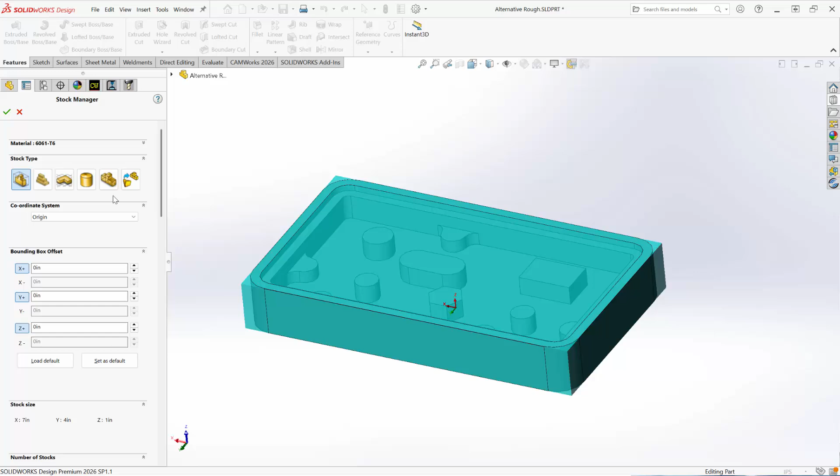Let's start out by getting everything set up. I have a generic machine selected. I'm just going to double check my stock manager. Looks pretty good for what we're doing, and then I'll just go ahead and select a coordinate system location.

Now that this is set up, what I'm going to do is manually create my mill part setup. I don't want any other features, so I'm going to go ahead and turn those off. We'll select this bottom face so that we're pointing in the right direction. And then I'm going to go ahead and create a multi-surface feature. I'm going to select all displayed.

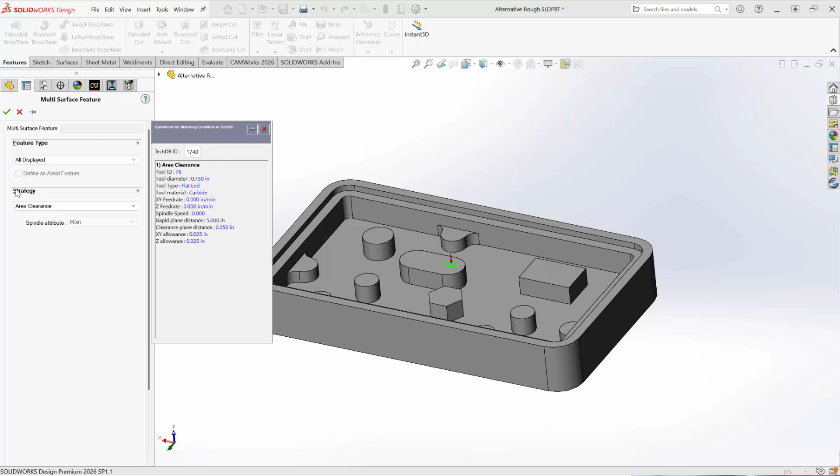And then in my case, I do have an area clearance already here where it's just going to do the roughing. So I'm going to go ahead and select that, and we'll hit OK, and then I'm going to go ahead and generate my operation plan, and then generate my toolpath.

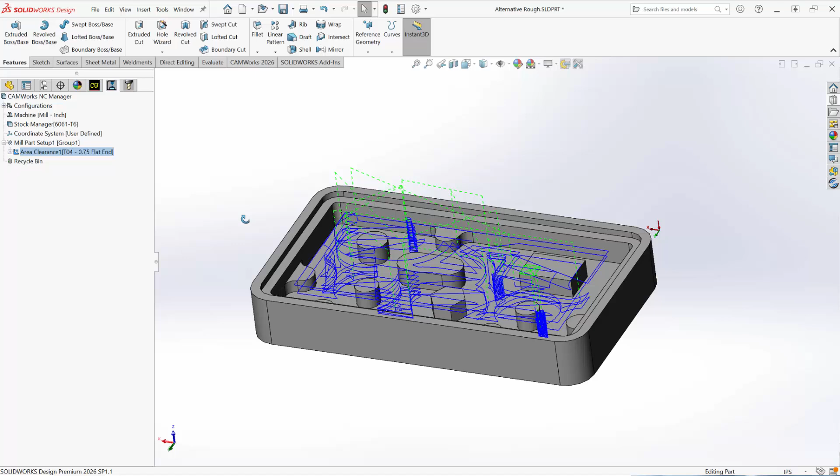And in this case, we could see that indeed all the roughing on the inside was done. So I don't have to worry about separate features for doing that. I can even go over and maybe use a different size tool. We'll drag and drop onto this 1/2 inch, and you can see that that toolpath is a little bit closer to what we're looking for as far as roughing goes.

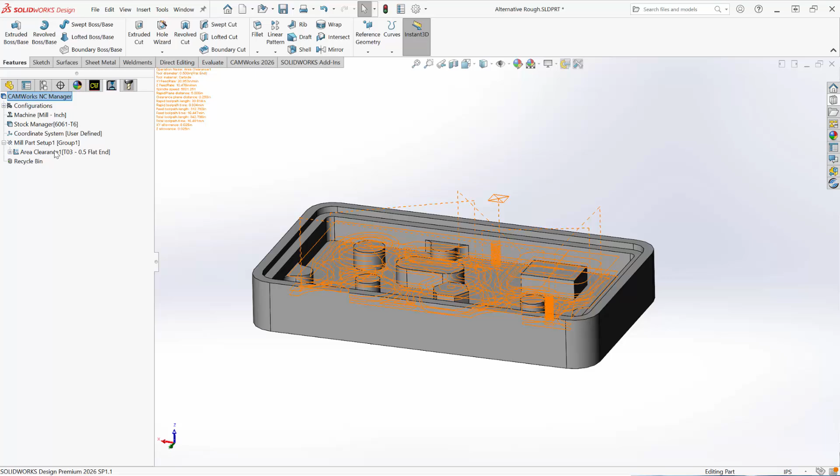Now, in this case, I'm doing the entire part. So as an added bonus in this video, let me add 2 other operations here that will allow us to mostly complete this part. So we have our roughing. The next thing we're going to do is we're going to right click, go to 3 axis mill operations, and I'm going to select flat area.

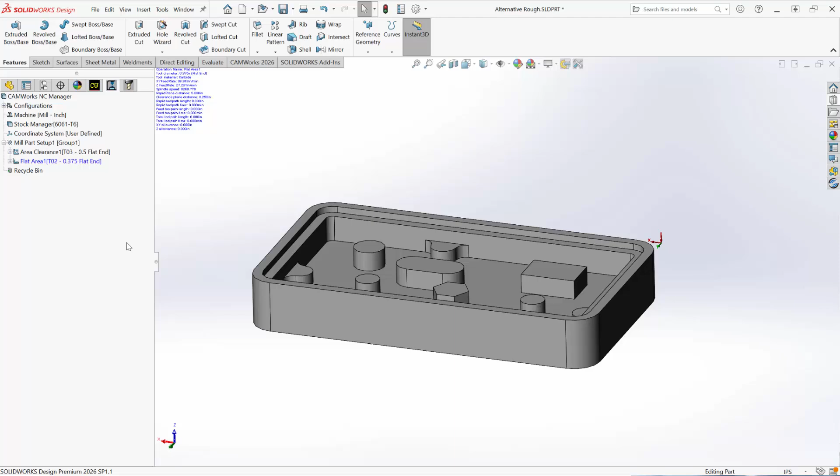And then I'll just pick this 3/8 tool here, and then we'll go ahead and hit OK, and I'm just going to generate the toolpath. Now this operation is just going to hit all the flat areas, and you can see it hits the top, the lip, the top of each of these features, and then the floor as well.

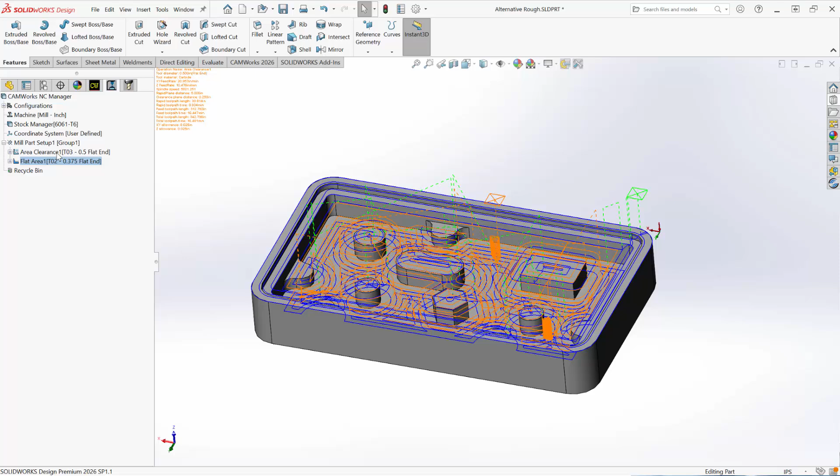And then one more added bonus or benefit of this method is that I can also add the Z-level milling operations to finish the outside of these. We'll go with a 1/4 inch tool here. I'm going to hit OK. I want to do this last. I'm just going to slide it to the bottom, and then I'm going to generate my toolpath.

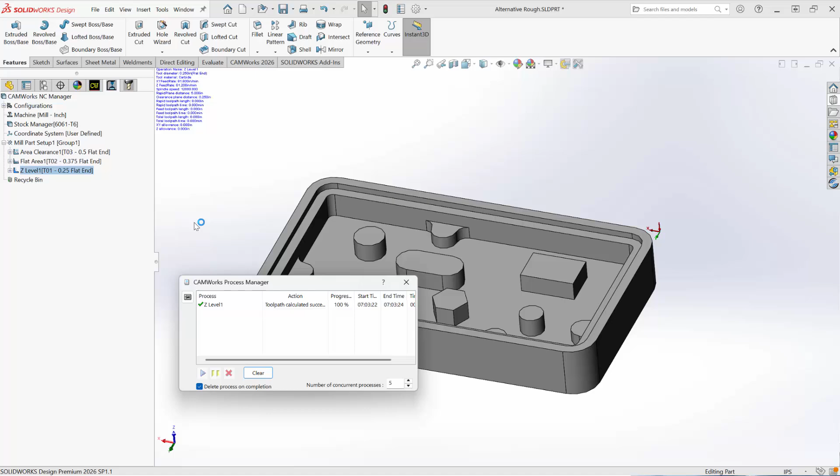So we start with an area clearance for everything. We're then able to do a flat area, and then we're able to do a Z-level. So that's a great alternate method of roughing and finishing this type of part if you were to ever run into it.